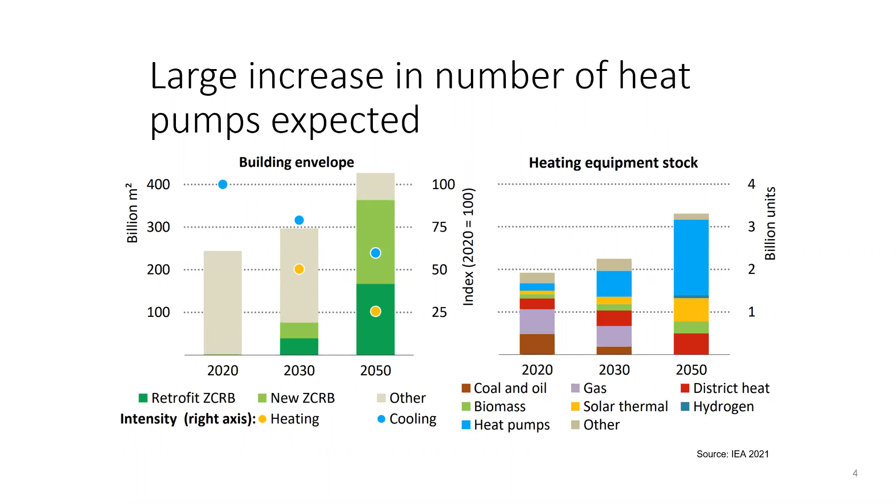So currently, and most of you will probably know this, heating is quite carbon intensive in Europe. And a good comparison, I think, is to put this into perspective. All the emissions from heating just homes, not even all the other buildings that we have, is equivalent roughly to the emissions from all the existing coal power plants that are still operational in Europe. So it's a significant chunk of our emissions.

And the climate neutrality goals set out in the European Green Deal really mean that we will have to change that quite rapidly. And just recently, Frans Timmermans, the executive vice president of the Commission, who is in charge of the Green Deal, reminded us last week of the scale of the challenge to meet net zero emission goals. And here's what the Commission thinks is needed. Next slide, please, Georg. Thank you.

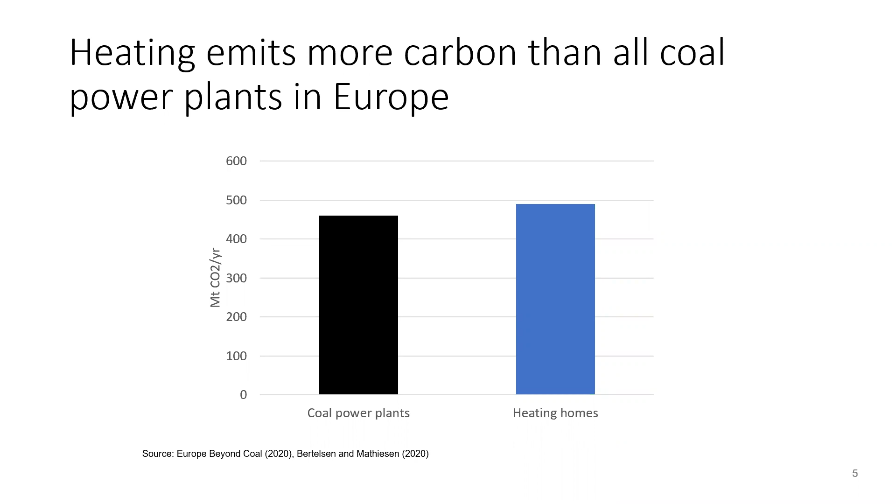This is from the most recent impact assessment that looks at what kinds of policies might be required to meet the 55% reduction goals by 2030. And the numbers are really quite stark, I think. First of all, the Commission believes 60% emission reductions in buildings by 2030 based on 2015 levels will be required. And that's a very big reduction, unprecedented, will require a very big effort at all levels.

And essentially what the Commission believes is this could be achieved by two factors as laid out in the impact assessment. First, we will need to increase the energy savings rate by a factor of about 10 through renovating more buildings, increasing the depth of the renovations we undertake in terms of energy efficiency gains. That's a huge challenge. Currently, we are lagging far behind, both in terms of the renovation rate and the depth of the renovations that are undertaken.

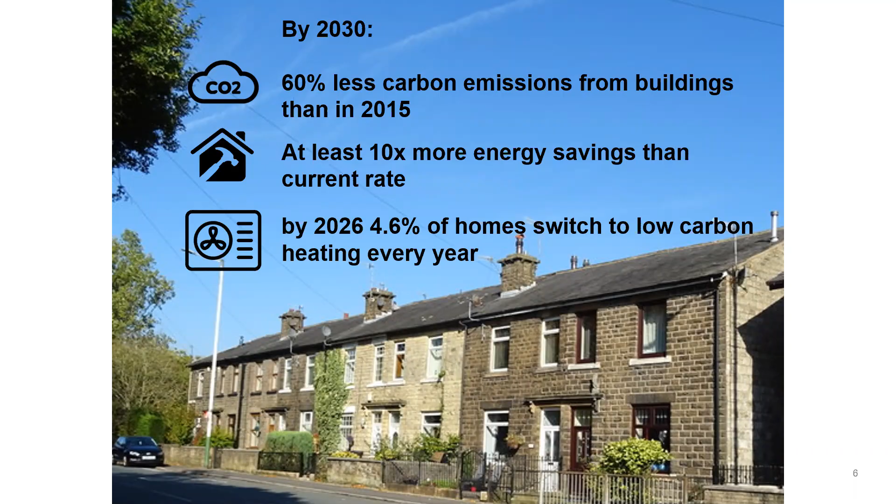But the second step, and this is where I think the webinar today is particularly important, is to accelerate the replacement rate of existing heating systems and install low carbon heating systems instead. And many of those are assumed to be heat pumps. So this gets me to the last and final slide before I hand over to Georg.

So it is clear that converting fossil heating systems to heat pumps will result in significantly higher electricity consumption and additional load. There's no question about that. The degree, though, to which the existing power system can accommodate that additional load is a very important factor and has been hotly debated over many years, which I think is why Georg's presentation is particularly interesting. In the UK, and this is an example from the UK, this graphic made it onto the business cards of a well-known gas boiler manufacturer.

And the picture on the right-hand side shows how gas demand in the UK exceeds current electricity demand several times in the winter months. And it has been argued that this shows that it will be extremely challenging to simply switch from gas to electricity. And I do agree with that. It is challenging. However, there are several factors that this argument ignores, and the graphic is too simplistic in my view.

First, the actual peak gas demand is actually 40% lower, as more recent research shows. And second, if heat pumps are used, the energy required will be lower by a factor of about 2 to 3 because of the coefficient of performance, the high efficiency of heat pumps. And thirdly, if heat pumps were run smartly, and I know Georg will comment on this as well, the peaks could be reduced further, perhaps by as much as 30%.

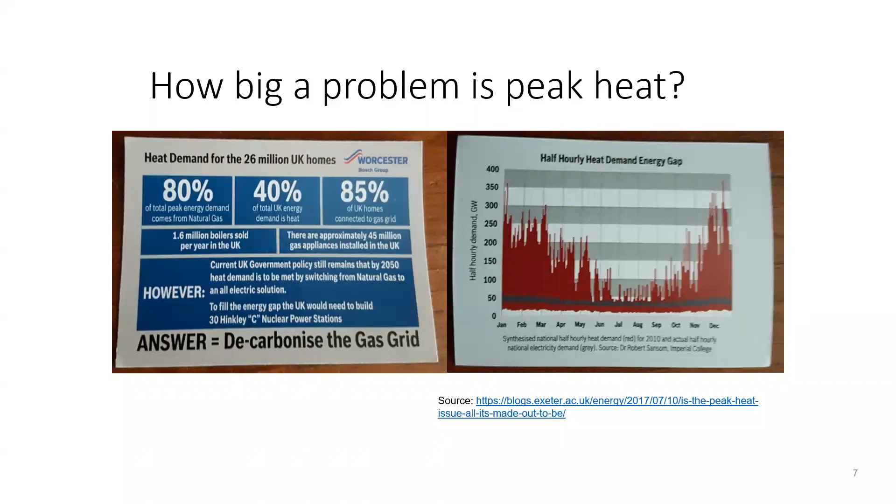So let's get Georg to tell us what he thinks, how much space there is in the existing power system to accommodate heat pumps in Europe, in different member states. And in his work, he has looked at existing capacity and how much heat electrification would be possible at the moment without having to make further investments in capacity. So over to you, Georg. I'm looking forward to your much more technical presentation.

Thank you. Yes, thank you, Jan, for this nice introduction, and I will get right to it.

So maybe let me start with the main findings of the study we conducted. It was published in a paper in the beginning of this year, and the first finding is, if we rely on heat pumps to decarbonize our heat system, member states can reduce their carbon footprint by up to 15% through electrification. So this does not go for all member states, as we will see later, but it depends on the heating in place at the moment. And this is without additionally expanding renewable electricity, so only with the system which we have at the moment with these emission factors.

Then the second point is, all member states at the moment are far away from critical levels of heat pump deployment. And we have a large group of member states who have enough firm capacity readily available to reach even very far-reaching electrification degrees. And then the third point is 29 to 45% of EU space heating needs could be provided by heat pumps without overstressing the system we have today in place.

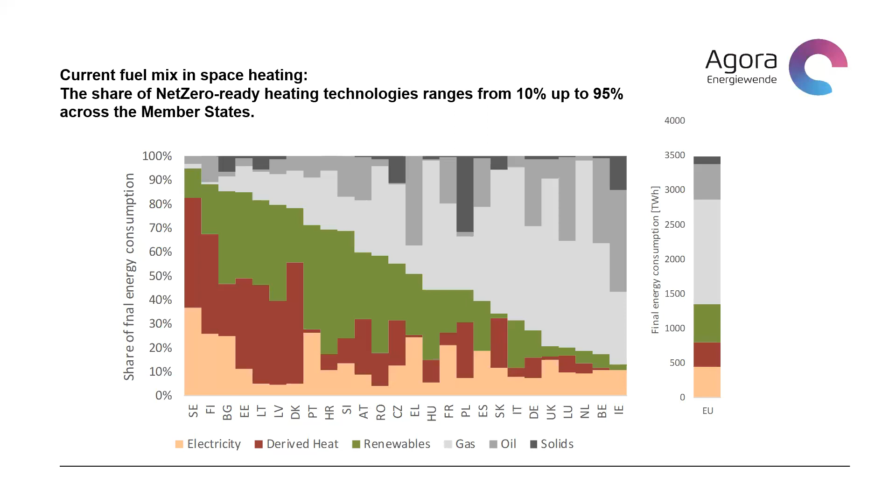So if we look at heat pumps, the big question is always, are they less carbon intensive than, for example, a gas boiler? Because the gas boiler is often the non-renewable heating option with the lowest CO2 emissions, or at least the fossil heating option with the lowest CO2 emissions. And if we compare the carbon footprint of 1 kilowatt hour of heat being produced by a heat pump with the footprint of one being produced by a gas boiler, we can say that in all these countries, which are boxed in red here, heat pumps are already more climate friendly than gas boilers.

And even in those countries, for example, in Germany, in the Czech Republic, or in Bulgaria, where this is not yet the case, we can see that it's rapidly approaching the same level. So they are not far from parity in terms of CO2 emissions. So we can say that probably, even if we look now at all these countries, most countries, if we assume a lifetime of 15, 20 years, over the whole life cycle, a heat pump will be more climate friendly than

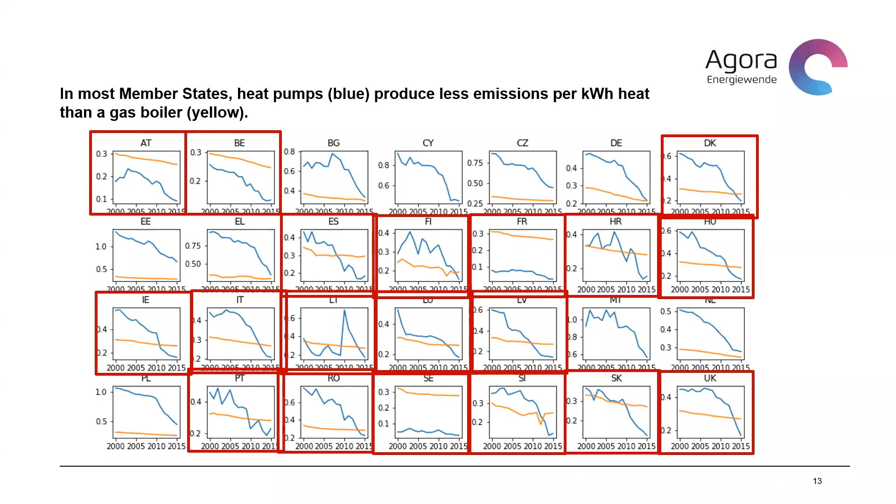And one aspect that we identified in our analysis, which plays an important role, although it's not the only, is the operating cost. So how much do I pay for 1 kilowatt hour of heat? And here we see that these countries which are projected to reach notable shares of heat pumps in their space heating system, basically, they often also have a cost advantage for heat pumps. So, for example, here we can see in France, there's a notable cost advantage, or in Sweden, even greater.

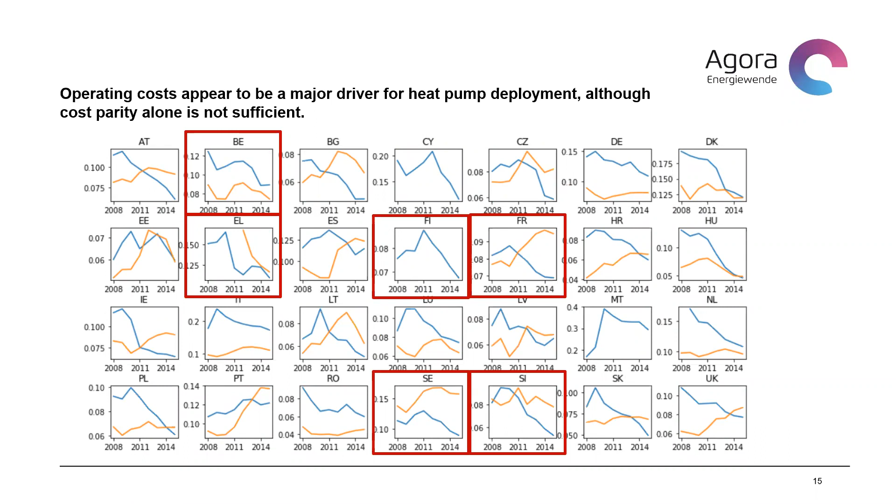The only exception to this, where heat pump heat is actually more expensive, is Belgium. So we see it's not the only factor, but it seems to be an important factor to speed up the deployment of heat pumps. This brings us to the method, which we applied for our analysis.

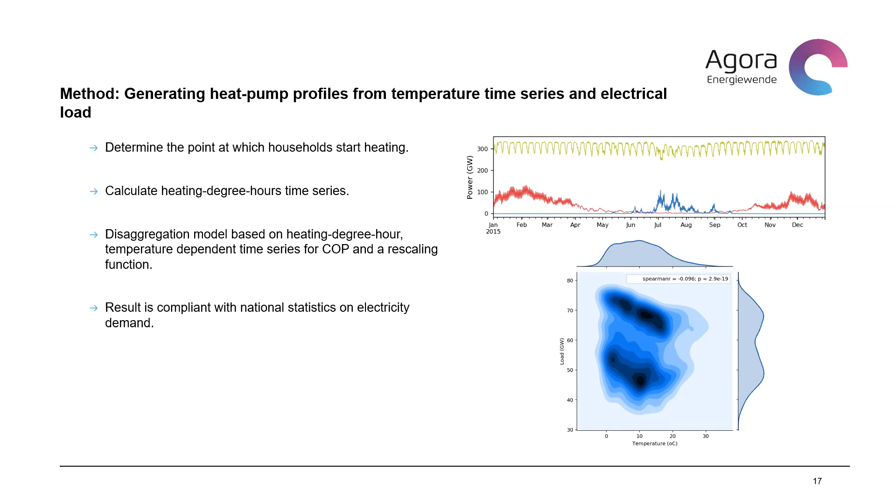Many of you probably know heating degree days. So this is the same concept, just on an hourly level, not on a daily level. And then we applied a disaggregation model, which also took into consideration the coefficient of performance of heating and cooling technologies to give us a disaggregation of the demand, which is compliant with the national statistics on electricity demand.

Then we created scenarios for heat electrification. So the first scenarios from EL20 to EL100, they describe a gradual electrification by replacing fossil heating technologies. So decentralized fossil boilers. For example, in the EL20 scenario, we take 20% of all fossil boilers and replace them with heat pumps. In the EL100, we replace all fossil boilers with heat pumps.

Then we investigate additional scenarios. What if we also replace all biomass-based boilers, which we can see here in the EL100 bio scenario, and then in addition also district heating with heat pumps. So these last two scenarios, especially the last scenario, is probably not very realistic, but it can serve as an upper bound to the discussion, because we will not get more electrification than if we build a heat pump basically in every building, if we supplied the entire space heating demand by heat pumps.

And if we now want to know, okay, but towards which scenario are we actually aiming at the moment, we can see that most countries are aiming towards the EL20 scenario. So that means they're not even reaching this necessarily, but this is like the lowest scenario that they can get. And only a couple of countries reach for higher shares. For example, Belgium towards 40% and Greece.

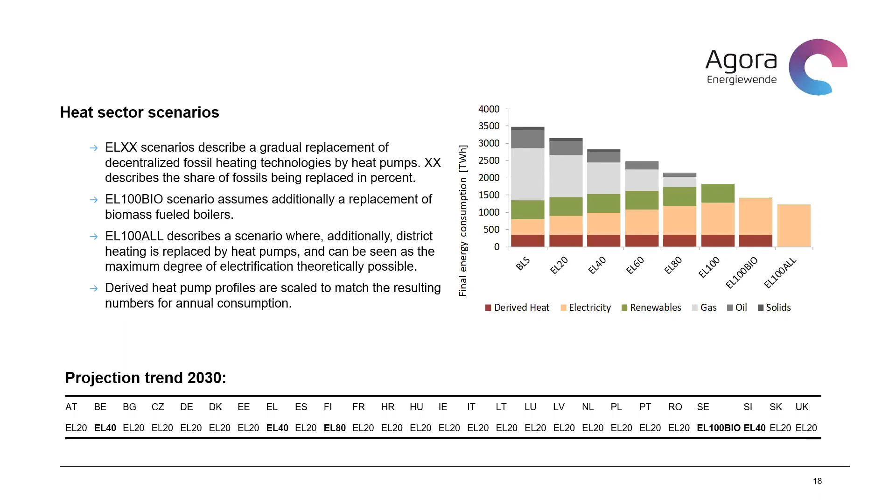To give you a brief overview of the method that we applied, we took these demand curves that we constructed, one for each scenario, and then we analyzed based on the current firm capacities that we have in the EU: does the demand exceed these capacities? So is there enough firm capacity to safeguard the demand increase we would see in each scenario? And this is, of course, a very conservative indicator. If we exceed the firm capacity, it does not mean necessarily that we will see load shedding, because we still have renewables.

There might be free interconnector capacity, so that capacities from other countries can satisfy this demand. And so therefore, it does not mean load shedding. But if it is below the firm capacity, we can say that there will be no load shedding. So it needs to be seen in this way.

And then as a second part of our analysis, we wanted to know what is the impact on emissions. And for this, for the first part, we stayed very conservative. We assumed that the additional demand from heat pumps is being satisfied by gas-fired power plants, because these are the ones, at least currently, with the ETS prices. Now this might change, but at the point when we did this analysis, the last plant in the merit order was usually a gas-fired power plant, and therefore we said the additional demand that comes from heat pumps would then be satisfied by a gas-fired power plant.

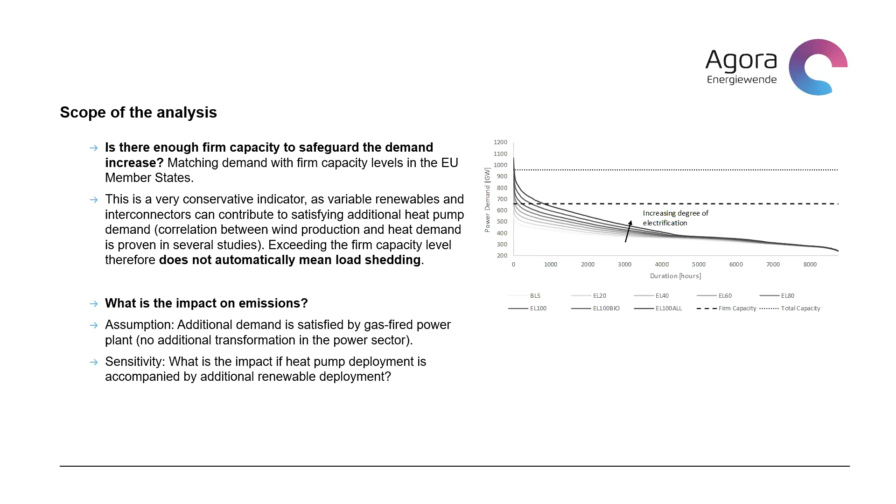So if we look at the number of hours which exceed the firm capacity, which can be seen in this table, we see that if we look at full electrification, so full replacement of fossil heating technologies, then there are still a lot of countries, I think 10 in total, which have no demand above the firm capacities, even if they replaced all these technologies. And there is also a number of countries which have very low numbers. For example, 7 in the case of Czechia, 28 in the case of Croatia, and just as orientation, Finland already has 1,400 of these hours today.

So it doesn't mean that in Finland we have 1,400 hours of load shedding each year. This shows that Finland probably has a certain import dependence and relies on capacities in other countries. And if we take this as an orientation, we can see that actually most countries are below the level that Finland has at the moment already. So we can assume that the system is ready for far-reaching electrification.

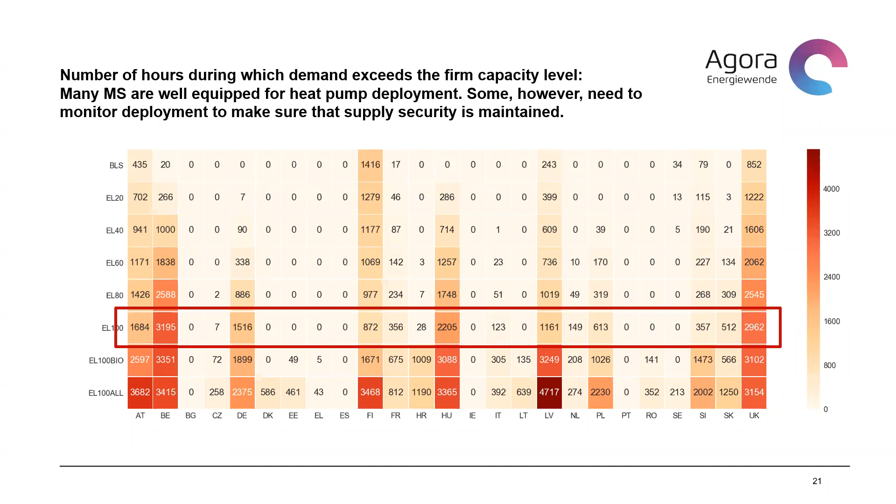And to see how this changes further, if we employ load shifting, we assumed that the thermal inertia of the buildings can be used to shift the load. And if we employed this inertia based on some values we found from the literature, which said basically per 1 square meter you can shift 0.1 kilowatt hours, if you assume that the inhabitants are fine with a deviation of 0.5 degrees Celsius, then you get that roughly you can shift 6% of peak demand to off-peak hours.

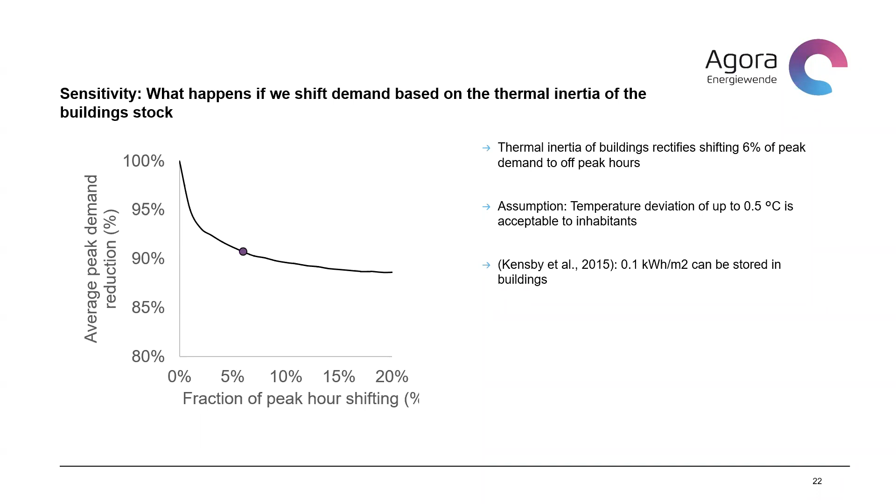And if we employ this now and look at our table again, we see that the number of hours above the firm capacities goes even further down. So then we have 12 countries instead of 10, which have 0 hours above the firm capacity in the EL 100 scenario.

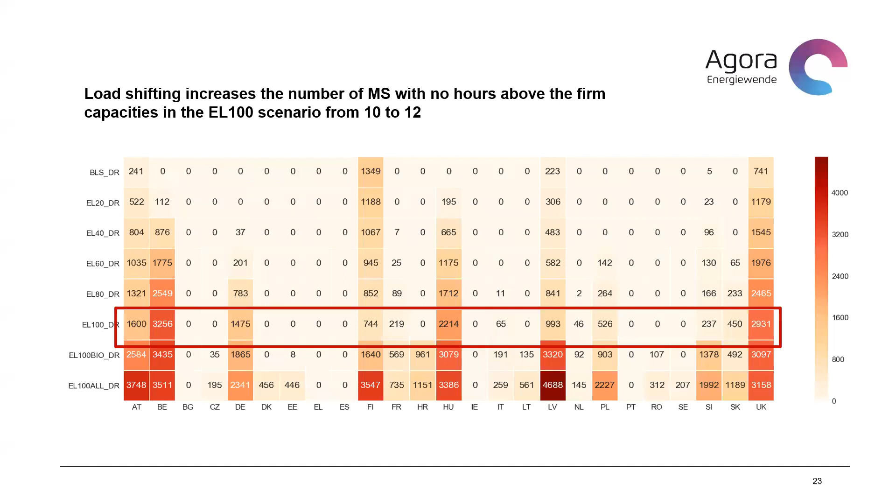Then one might, of course, ask, okay, this is the case now, but for example, in Germany, we are planning to phase out nuclear. A lot of countries in the EU are planning to phase out coal or are already on track to do so. How does this look in the future? And here we took the POTEnCIA Central scenarios from the Joint Research Centre of the European Commission, and took the annual capacity levels to look at how much demand is above the firm capacities. And for orientation, it starts a little above 2%. So what we just saw in the last two tables is roughly 2% or a bit more.

And here we can see up until 2030, the situation does not really change. So we are starting a little bit above 2%, and in 2030 it's roughly 3%. In the longer run, however, there might be a different situation because more capacity exits, there are more renewables and there is less reliable capacity. So in the longer run, we might have to monitor the situation because there it's actually not so sure. But also this means there is still time to react. So if we see, for example, that the necessary investments are not being realized, it's not the day after tomorrow, but it's after 2030 where the situation might become a bit more critical.

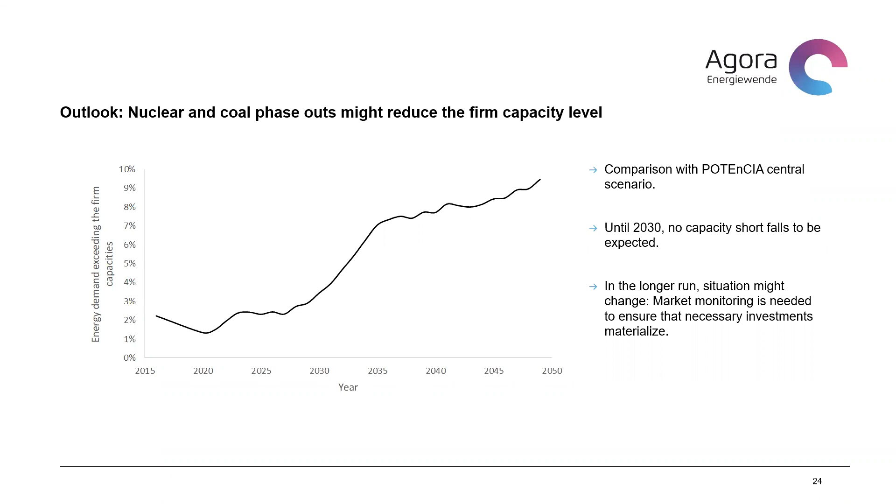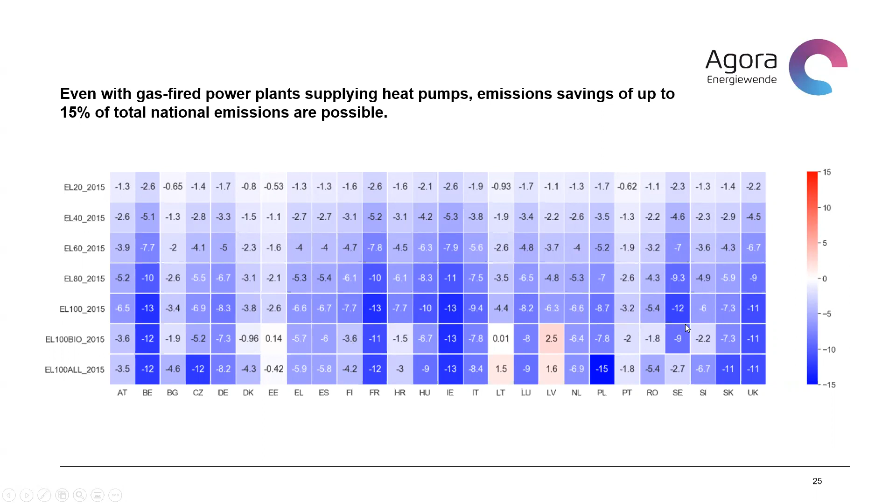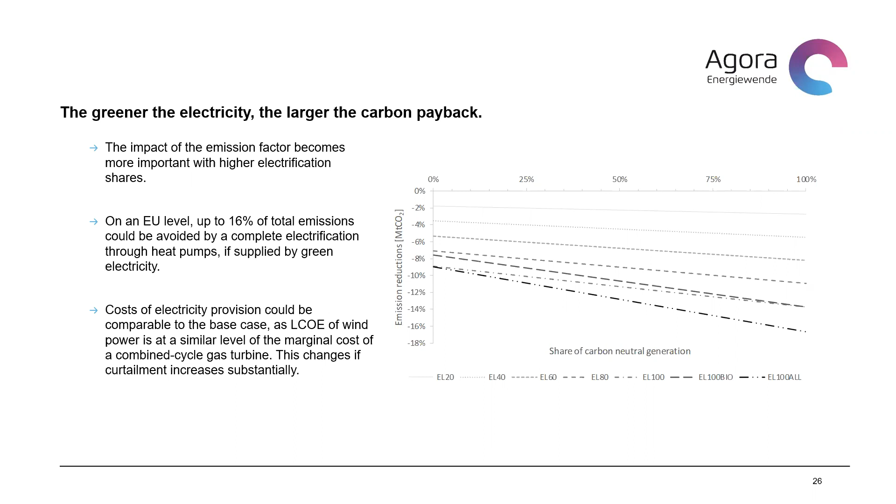This doesn't necessarily need to increase the cost of the system, because the LCOE of wind is somewhere in the range of 40-50 euros per megawatt hour, and this is also the marginal cost of a combined cycle gas turbine. But of course, if we then get to a point where a lot of additional wind power is curtailed, then this is not fitting the analysis anymore, because then the LCOE of additional wind power could actually increase again.

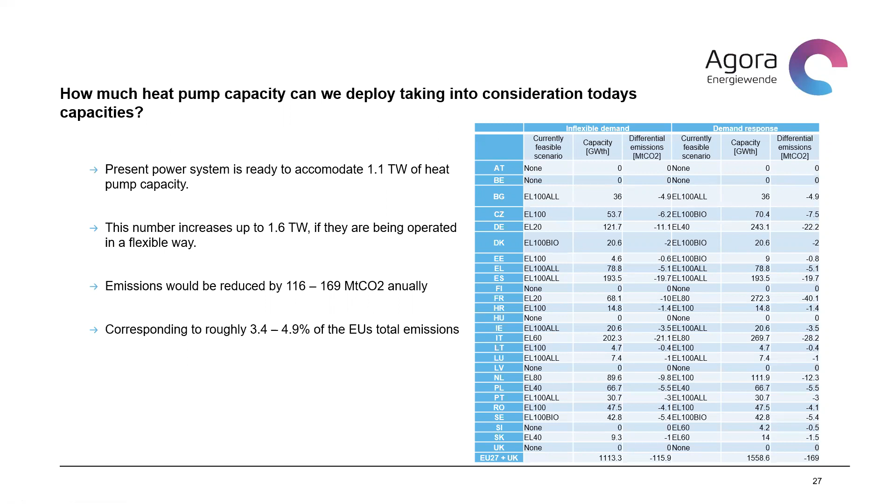And if we even assume a flexible dispatch of heat pumps, which is on the right side, the demand response scenarios, we can even install 1.6 terawatt across the European Union. So this is still far away from the deployment we see at the moment. But if we did so based on the current electricity system, and also assuming that gas-fired power plants provide the additional demand, so with no additional renewables, we could save 116 to 169 megatons CO2 annually, and this corresponds to 3.4 to 4.9% of the EU's total emissions. So just based on today's power plant park.

So that brings me to my key takeaways. If fossil boilers are replaced, heat pumps lead to an emissions reduction in all EU member states. On a national level, we can reduce up to 15% of total national emissions through electrification, even if we do not accompany this by additional deployment of renewables. Currently, all member states are far away from critical levels of heat pump deployment based on current deployment rates. A majority of member states also has enough firm capacities readily available even for far-reaching electrification. But there are some member states, which we also saw in our analysis, which should be aware of heat pump deployment and monitor whether the necessary investments in the power sector materialize to safeguard the additional demand.

In total, we concluded that you could deploy 1.1 to 1.6 terawatts of heat pump capacity across the EU, depending on how flexibly heat pumps operate, without overstressing the system that we have in place at the moment. This would correspond to between 29 and 45% of the EU's space heating needs, and reduce carbon emissions by 3.4 to 4.9%. And the larger the level of electrification, the bigger is the impact of the electricity mix. If we combine heat pump deployment with simultaneous expansion of renewable capacities, then we could save up to 16% of the EU's total emissions.